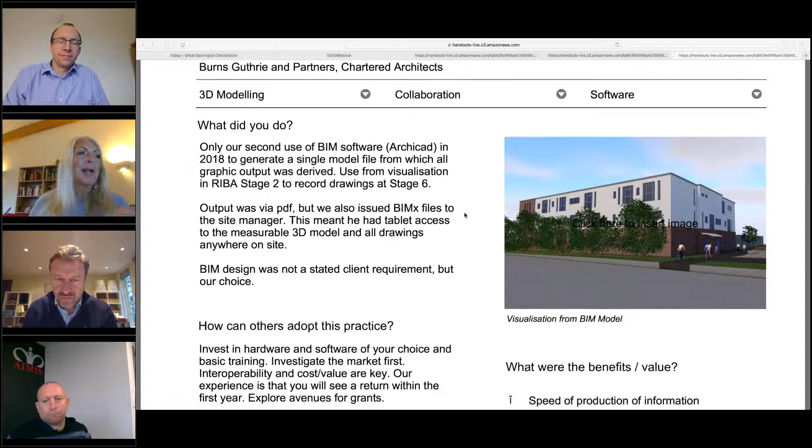BIM design was not a stated client requirement, but it was our choice. And going forward, our choice is to use the BIM software on absolutely every project.

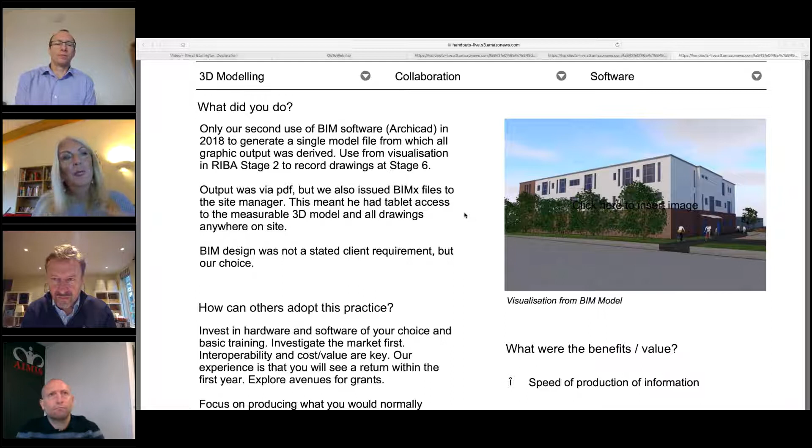We also used a little add-on to the software called BIMx, which is a way of distributing the model in a very simple to understand way. The BIMx file is uploaded to the cloud and then downloaded to anyone's device, whether that's a phone, a PC, or an iPad. The BIMx file contains all the PDF output as well - so the BIMx file for this project included the model, but it also included all the PDF files.

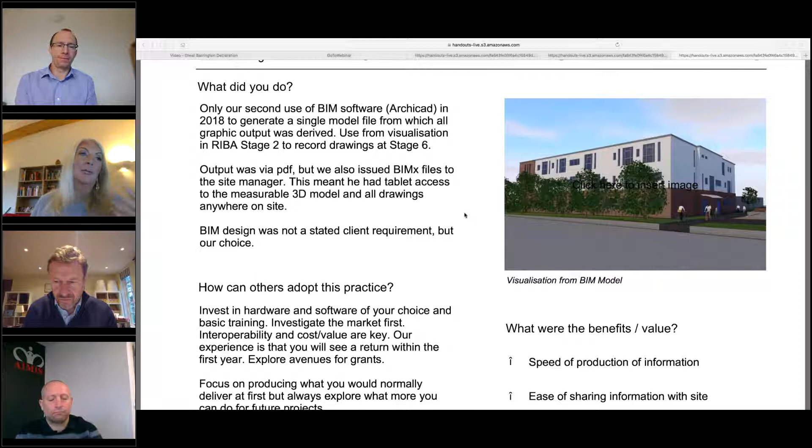I'll come on to that a little bit later. How do we get there? How can others adopt this practice?

Unfortunately, you have to invest - in the hardware, the software, and training. And you also have to accept that there's going to be a period of learning, that curve of getting into the software and being able to use it. And that is the big risk, that's perceived as a risk. It may be dependent on the staff you have and their willingness to accept change.

But we bit the bullet in the end, and we were able to do that because we managed to acquire some grant funding. Basically, the total investment was the equivalent of 25% of our annual turnover - that's a big chunk to take from any one year. So this particular grant scheme allowed us to spread that over 3 years, and they also granted us 40% of the capital cost. That was absolutely vital to us as a small practice.

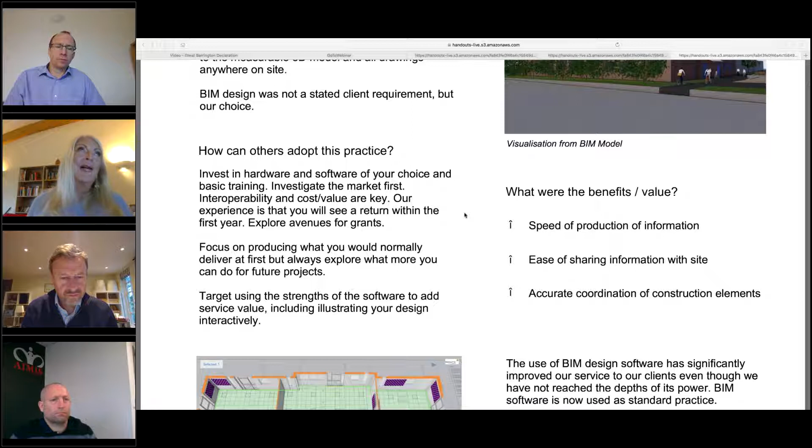Ease of sharing information with site, which again is something I'll come on to a little bit later, but that was using a product called BIMx. Accurate coordination of construction elements - now, this is one of the revelations of working with BIM software. It's something I touch on in the answer to the next section, in the use of BIM software.

As architects for many years, we developed this skill of being able to look at 2D information and imagine in 3D. So we have a reasonably accurate understanding from 2D information of what the 3D will look like. But obviously it takes time to get to that situation.

We kind of design with sketches and sort of images in our head, but with BIM software you can actually design in 3D, and you can design accurately in 3D. So basically that's the major change I found in switching to BIM working. And it was quite revelatory because it had a significant impact - it really made me realize that this was the path to go down.

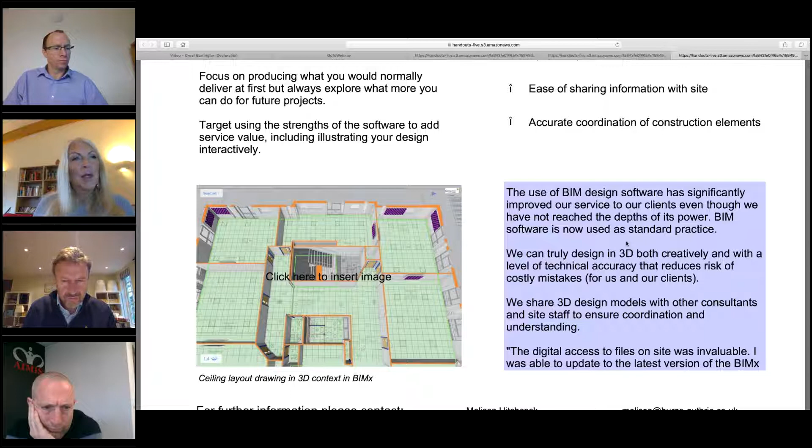Whoever has that on site can go literally anywhere on site. If I click on this, I can give you a quotation. This is the guy that worked on the Angmering project, the site manager, he found it an absolute revelation, and he saw it as the future. He gave me a quotation, which you're at liberty to read. The digital access to files on site was invaluable, and he could take that on. He took his iPad onto site, and he could show anybody on site if they had a query.

Well, what happens here? What's the intent of the design? He could actually illustrate that in real time to the person. He could even measure distances on that. So, for instance, if he wanted to have an indication of the door setting out, he could measure that. But he did also have access to the setting out drawings.

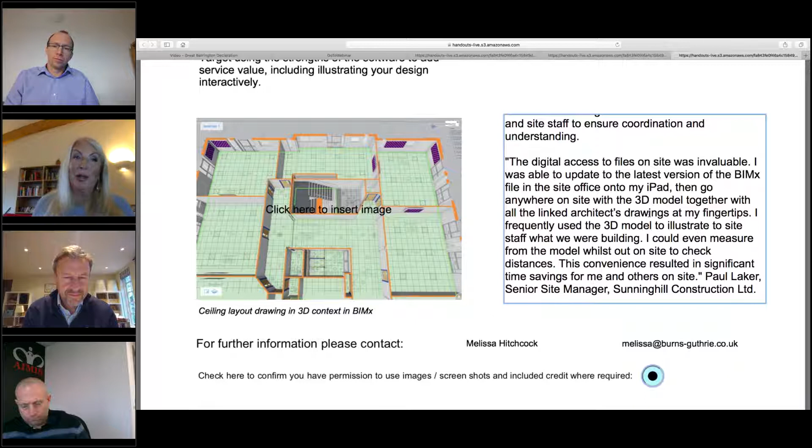What he found was that he could take that information onto site and access it rather than being on site and realizing he's got to walk back to the site cabins, find the information on paper, get that information, and then take it back onto site. He had that with him all the time, and the final line is, this convenience resulted in significant time savings for me and others on site.

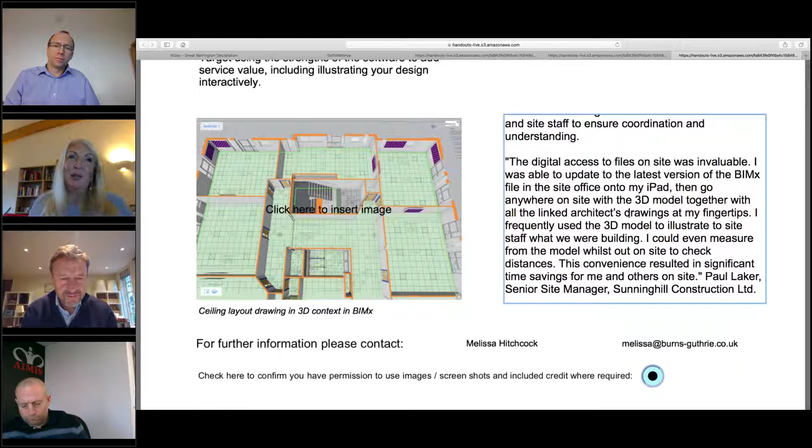And we actually use the BIMx software too, to send to clients, because to send a 3D image or a 3D model to our clients is something that they can literally walk around. They can see what our design intent is, and they can even use Google Cardboard to actually physically walk around the building.

So finally, some of the big picture things: with the implementation of BIM software as part of an architect's process, always push boundaries, experimentation all the way through. For instance, we're currently looking at automatic scheduling of building elements and materials to help project costing, but we're now also looking at embodied carbon analysis.

Invest time in developing a template. It will reap dividends. The BIM software templates are an absolute must. There is one that comes straight out the box, and it is very comprehensive, but it just needs tailoring to your methodology, your method of working, your office standards. But it will reap benefits. And as part of that process, you can have favorites and libraries of standard elements.

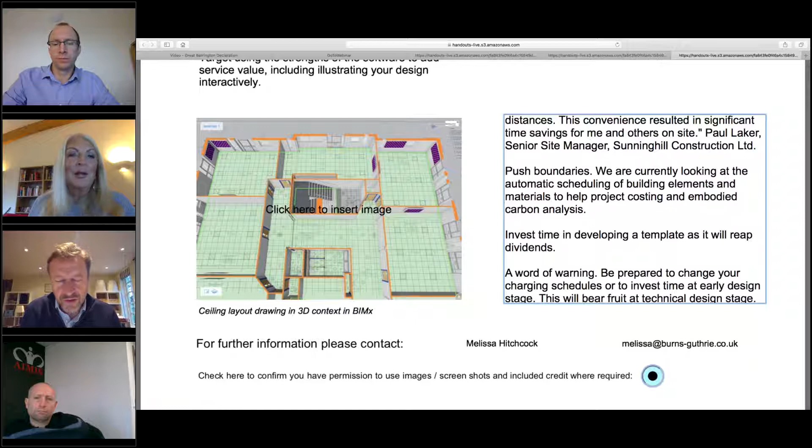That's fantastic, Mel. I think doing your own personal journey on this, it's impressive that you're really starting to see some benefits. I've got some questions which I'm going to save to the end because I suspect we're going to have some common ones. I haven't got any specific questions on that case study unless any of the panelists want to say anything now, or we store them up for the open discussion at the end.

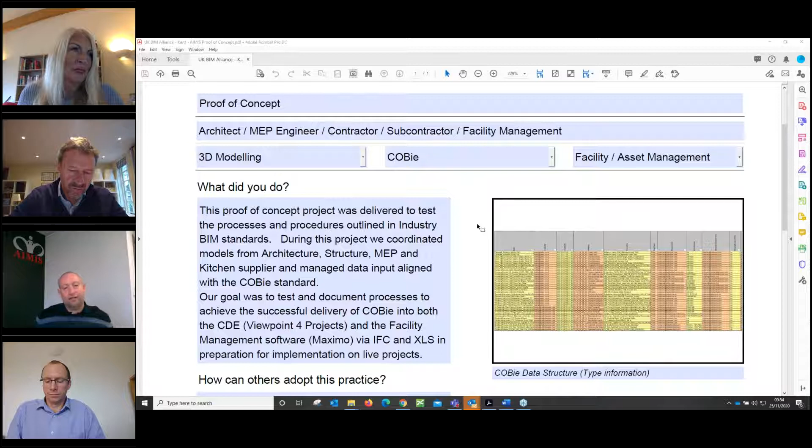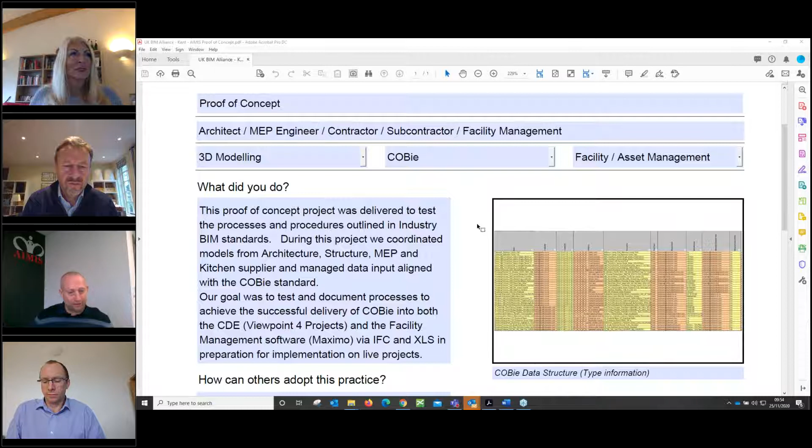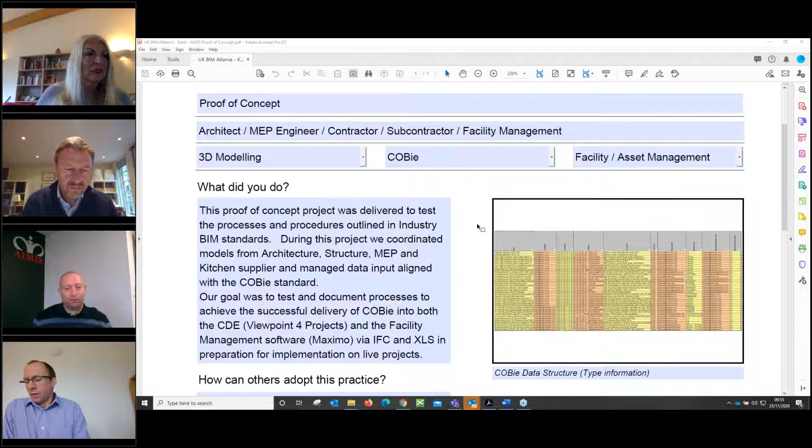So this is the point of this case study - it actually takes a lot of testing to make sure you're going to get this right. The goal - don't think you can just go through a project testing this one way and then get to the end and it's all going to be fantastic, because it really won't. Test little bits, make sure you're putting the data in the right place at the right time so that everything can read it where it needs to. And if you test those little parts, then you can carry on with the rest of the project knowing it's going to be okay.

So we needed this data visible in the right structure - through the IFC for Maximo and Viewpoint 4 Projects, but also to make sure it came through in the XLS format, which you can see on the right hand side of the case study - that's a screenshot of this COBie dataset. This is what people tend to visualize when they hear of COBie. But there is a data checking tool, a free tool online, which you need to run through, because COBie is a standard and you need to test that the right sort of data is in the right place to make sure it's compliant with that standard. We needed that XLS to be able to run through the checking tool.

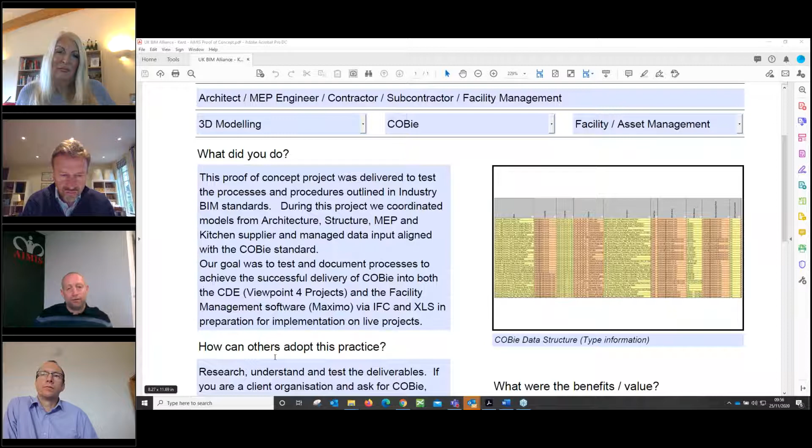And all of this was done basically in preparation for implementation on live projects. So like I said, it's a proof of concept. It wasn't a live project, but it was setting up this organization for future live projects, which are going to start imminently.

In terms of how others can adopt this practice, it's all about researching and understanding - research, understand and test your deliverables before you go ahead and do the whole project. If you're a client organisation asking for COBie, make sure you have a purpose for it - do you really need COBie? This is something we've come across far too often over the years, and it's something we're trying to hopefully break the mold on. Whatever data you're asking for, you just need to have a purpose for it - is it right for you? We've got some clients we're working with at the moment who've heard of the COBie stuff, but when you look at the systems they're using, COBie's a complete waste of time. They need a different data structure to feed their systems, and that's what developing your requirements is all about.

So it's not always going to be COBie. If you're a designer or a contractor appointed to deliver COBie, research it and test the delivery strategy. Like I say, it's not going to be smooth, here you go, here's a COBie file. It takes that testing. Structured data requires good planning, especially when different software is being used.

Know that COBie also is a US standard, not a British standard. There is a BS 1192 Part 4, which is the UK version of it, but COBie was developed in the US for a specific purpose. And the UK has just tried to sort of squeeze it into something that will work for us, which maybe works, maybe doesn't so much.

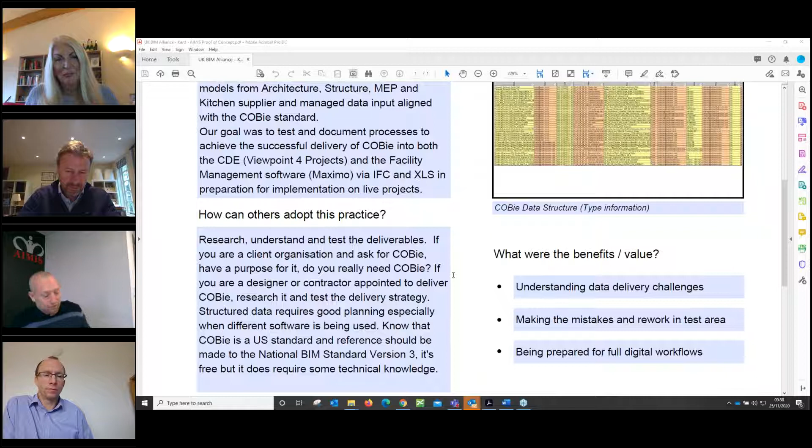But go by the US standard. It's called the National BIM Standard version 3. It is free, but it does require some technical knowledge. My advice, if you're being asked to deliver COBie, is read that, go through that, and then you've got the right sort of guidance there within that document. But like I say, you do need a bit of that technical knowledge for it. I'll go through the sort of benefits and values later.

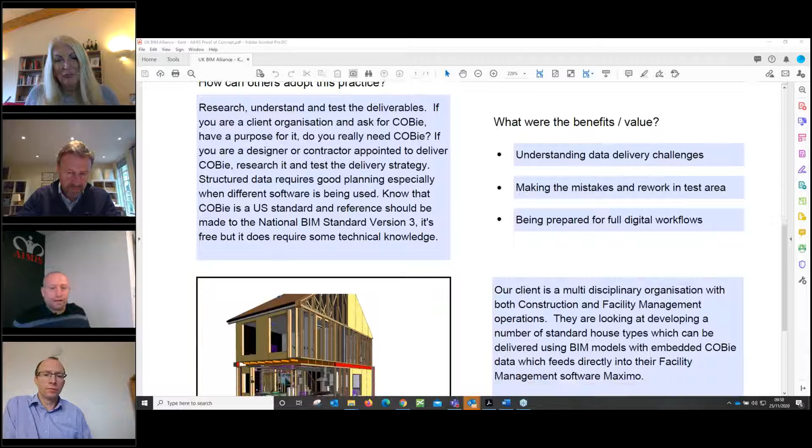This image here on the left-hand side, I was playing around with this yesterday to try and get something that visualized what we were doing from a geometric point of view. So you can see I've hidden various different bits. We've got the substructure, which was done in the architectural model. You can see all the stud work and the roof trusses in there from the timber manufacturer, with the OSB boards or whatever boards they are on the outside there. You can see the kitchen in here as well and the stairs, and you can see the MEP. You've got your water tank over there. There's an MVHR unit somewhere in a cupboard over on the left-hand side there as well. So all of these disciplines were brought together to get the coordinated 3D geometry, but they were also loaded with the COBie data.

So then this last box here, where it starts with our client, this is just a bit more information about the project. The client is a multidisciplinary organisation with both construction and facility management operations. They're a huge organisation, they do all sorts of things within the built environment. And they're looking at developing a number of standard house types because they do a lot of housing developments and have standardised house types.

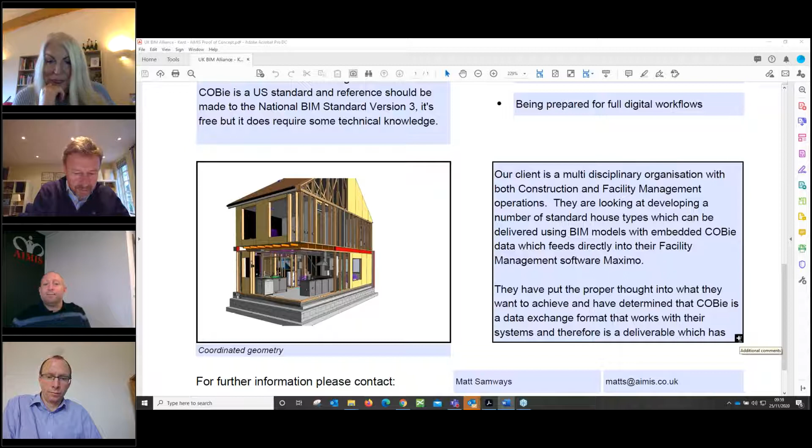They want to develop these as BIM house types with the data so that the projects can be delivered using these BIM models with all the embedded COBie data, which then feeds directly into their FM software, Maximo, because they are maintaining these assets for a number of years afterwards. So it's an end-to-end solution for them. They've put the proper thought into what they want to achieve, and this is really important from a client organisation or a development organisation. They've determined that COBie is a data exchange format that works with their systems, and therefore it is a deliverable which has been tested and proven to work.

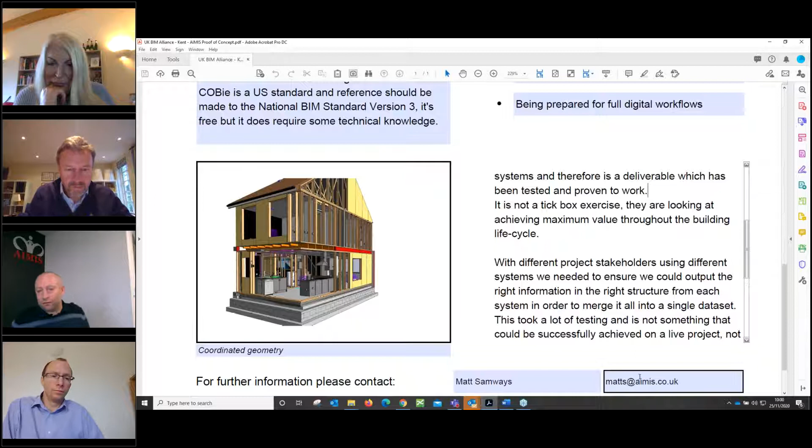So that's what this concept project was all about. It was testing it and proving that it all works. It's not a tick box exercise. They're looking at achieving maximum value throughout the building life cycle. And with different project stakeholders using different systems, we needed to ensure we could output the right information in the right structure from each system in order to merge it all into a single data set. This took a lot of testing. It is not something that could be successfully achieved on a live project, not without significant delays and hurdles at least.

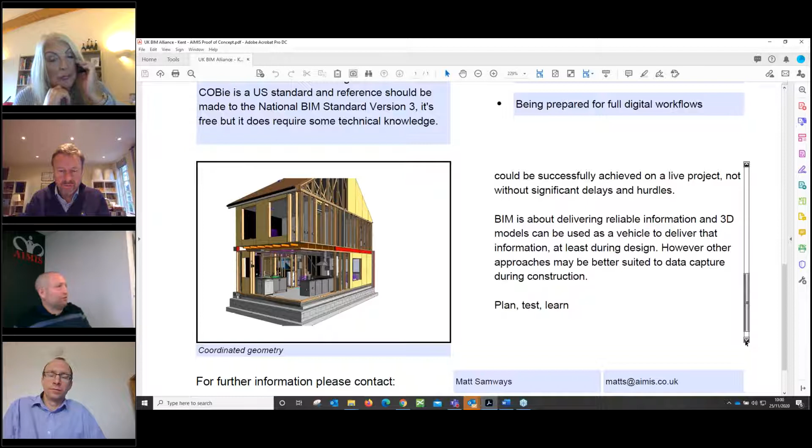So BIM is about delivering reliable information, and 3D models can be used as a vehicle to deliver that information, at least during design. However, other approaches may be better suited to data capture. We're not necessarily going to be loading construction information from a COBie structure into BIM models - that may not be the best way to do it. There are other ways of capturing this data. So it's about planning, testing and learning, as I've said a couple of times.

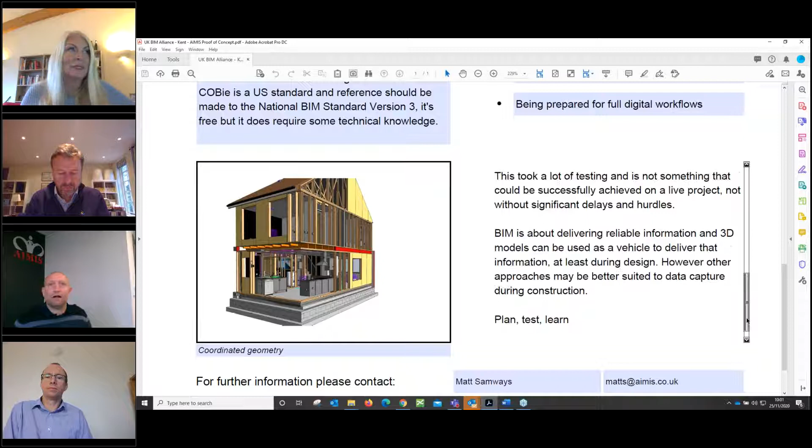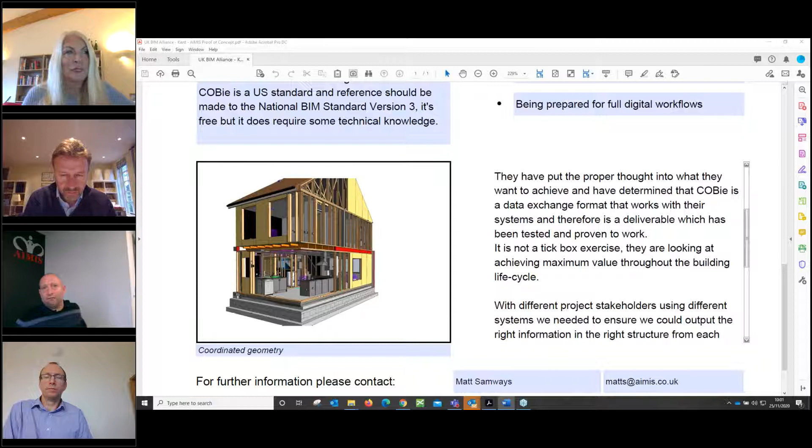It's important to note that although COBie is a verified, tried and tested data schema, and it has been included within the UK BIM framework deliverables if specified, such as government projects, it's not necessarily fit for everybody right here, right now, for all organisations. I've mentioned before, we've seen a lot of requirements asking for COBie with no purpose for it, no systems to accept the data. There's almost certainly a premium to be paid for delivering this and for no added value whatsoever. There's simply a lack of understanding that people assume they need COBie when actually they don't.

Some more advice really, if you want to embark on your digital roadmap, which you most certainly should if you haven't already: start small and evolve. Right now, clients have systems. Many of them will operate with a data import export function compatible with CSV files or databases. Let's look at these structures and use this to start to understand digital information delivery and the use of models and forms as a means to exchange this data. This way, we're dealing with information people are already familiar with, and then we can look at what improvements can be made later. So it is a journey, as we've said before. It's not something that you're going to instantly become masters of.

And that is the point around understanding what you need, planning how you're going to get it, testing what works before you implement it on a live project, and then learning how to continually improve it. This way we can all upgrade our very, very outdated industry.

And I was going to add in a few things there on that note with the outdated industry thing. Is anybody in the room - you don't have to answer the questions - but does anybody still use a camera with film, play cassette tapes or video cassettes? What about a phone with a turn dial, or use a typewriter to write a letter? All of these things were in widespread use at the same time as 2D drafting and paper-based information management in construction. All of these things are virtually extinct and have now digitized. Why isn't construction? So it's just a little bit to finish off there.